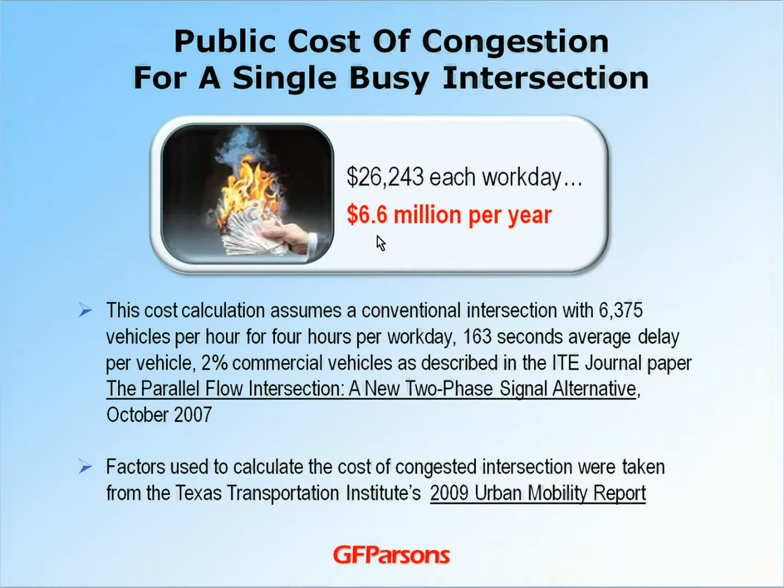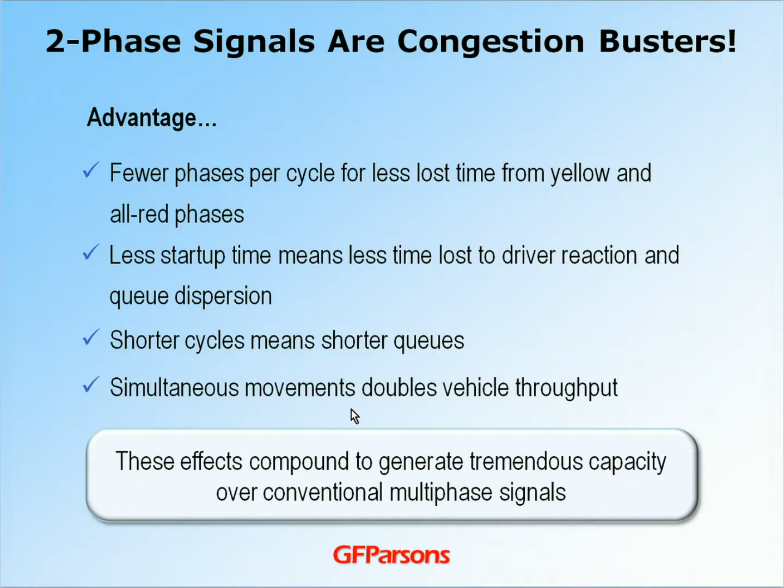But there is a solution: the two-phase signalized intersection. This is an at-grade intersection with no bridges or retaining walls. The two-phase intersection won't solve every congestion problem, but it should be given serious consideration as an alternative to interchange construction. A two-phase signal will have fewer phases per signal cycle than a traditional signal, less startup time, shorter cycle lengths, and simultaneous vehicle movements. So all these advantages compound during operation to make the intersection very efficient.

The two-phase intersection currently comes in 2 types, the PFI and the more commonly known CFI. There are several CFIs that have been built and are currently in operation. The main difference between them is the placement of the bypass roads, with the CFI putting them directly adjacent to the approach road and the PFI adjacent to the crossroad. So for more information on the CFI, I suggest the FHWA publication, Alternative Intersections, Interchanges, Informational Report.

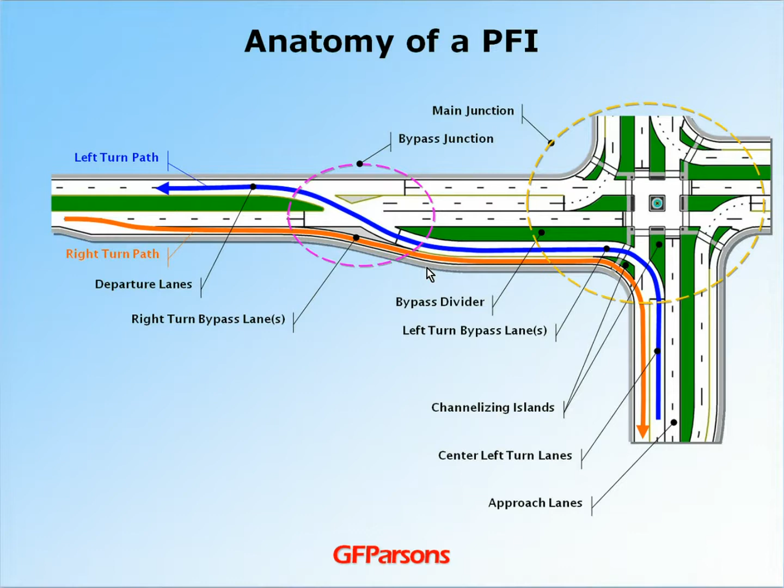At first glance, the PFI might look confusing, but a more careful look will reveal that it's basically a standard intersection, but with channelizing islands added to guide drivers and a bypass road to remove conflicting movements from the main intersection. How does the PFI work? It's pretty simple really. Drivers turn left onto a bypass frontage road just before the main intersection. This is different than the CFI, which requires drivers to turn onto a bypass ramp far in advance of the cross street.

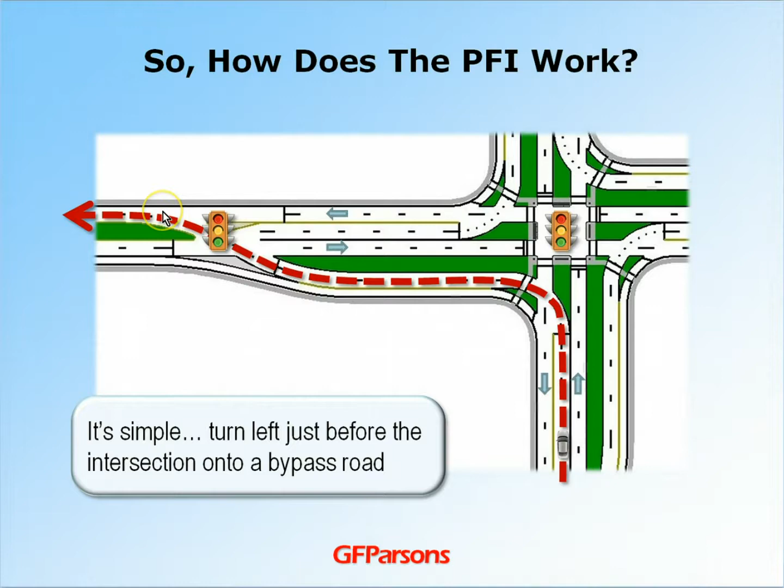Channelizing islands are added at the main intersection to guide drivers onto the bypass road, and a traffic divider to separate the bypass road from the cross-street traffic. The left-turning driver then turns onto the cross street at the bypass junction. By removing the left turn from the main intersection, otherwise conflicting vehicle movements can then be performed simultaneously. This is how phases are removed from the signal cycle.

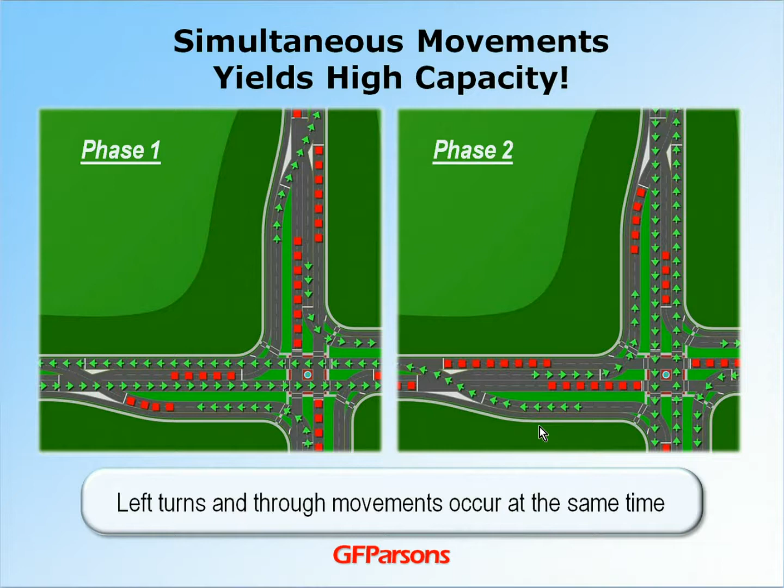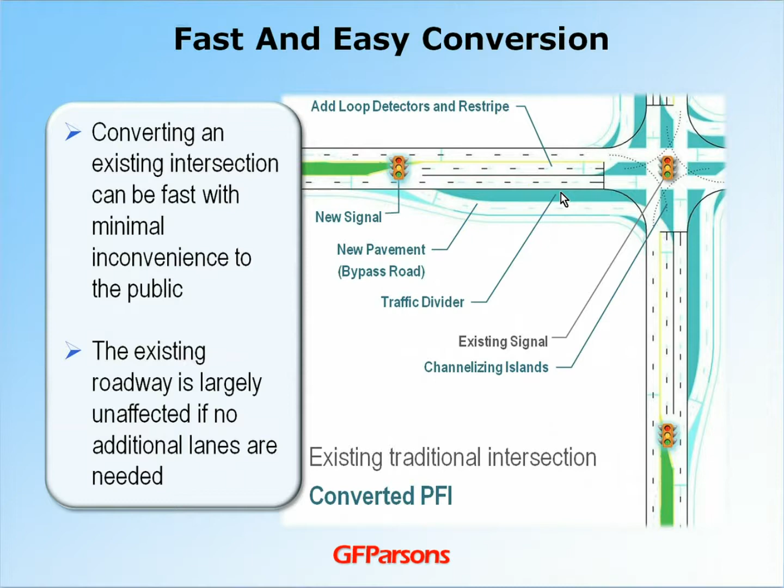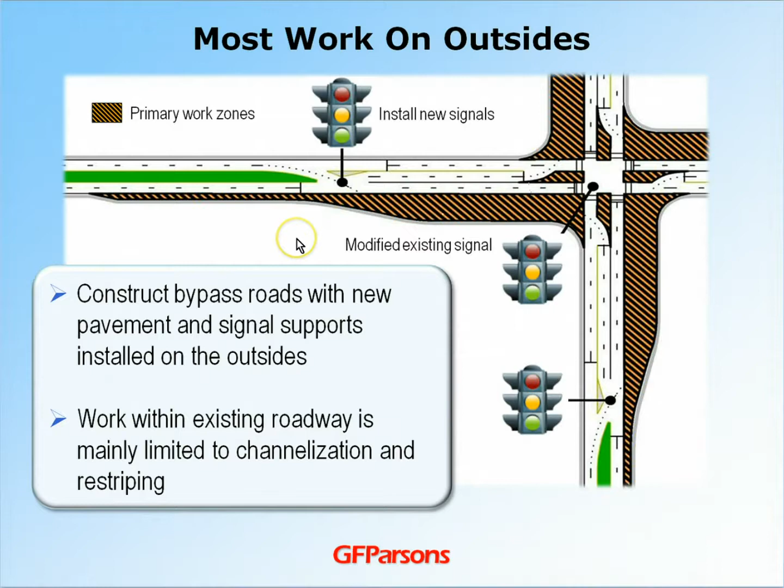Constructing the PFI at an existing intersection can be a relatively quick, simple, and safer operation. In many locations, the traveling public will experience little inconvenience, since most of the work is performed on the outside of the existing roadway. So we can see from this graphic that the work zones are largely on the outsides. This will be true if no additional lanes are added to the existing roadway. The PFI can be expected to improve safety over that of conventional intersections. There are fewer conflict points, no permitted left turn movements, and pedestrians have use of refuge islands.

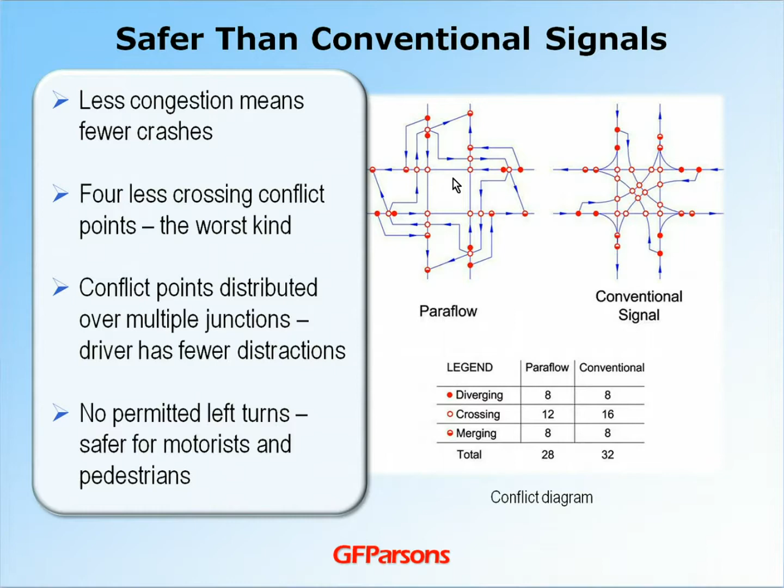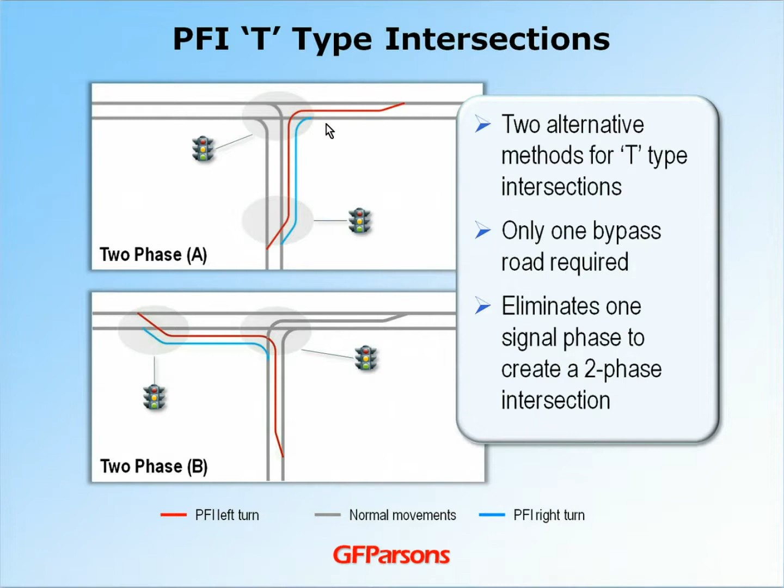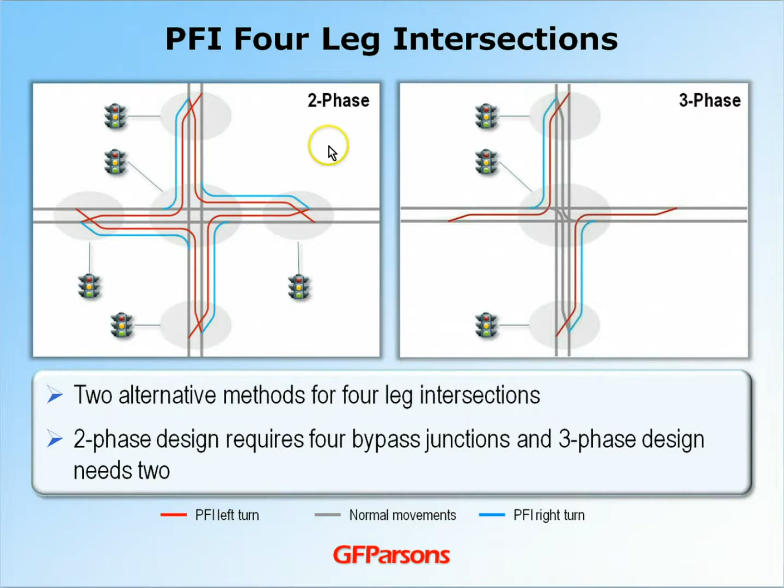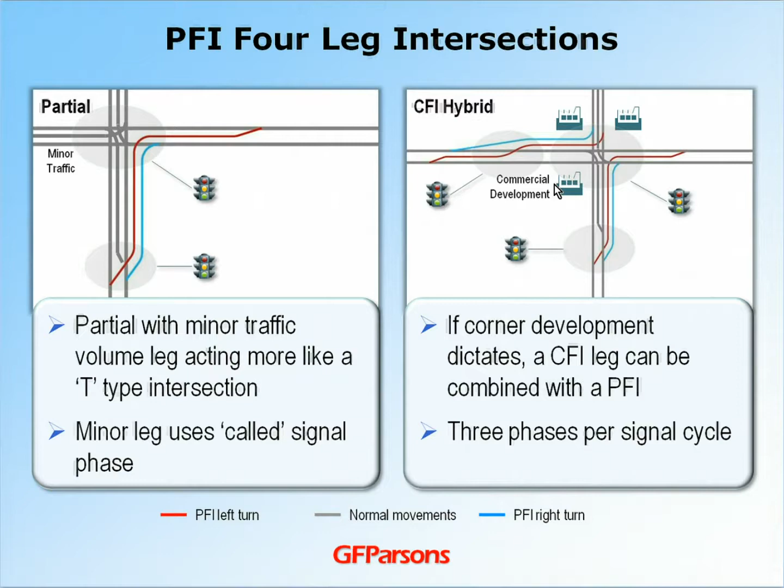The PFI can also be constructed in several interchange arrangements to create 2-phase operation on the arterial. The parallel flow interchange will have capacities exceeding the diverging diamond interchange, depending on the site. The physical site will determine which design is most economical. In this graphic, 2 variants of PFI diamond, or PFDI, are shown. For an interchange conversion, the spread variant under the freeway can be a very economical conversion, even much less expensive than the DDI, if there is space under the end spans of the bridges for the bypass lanes.

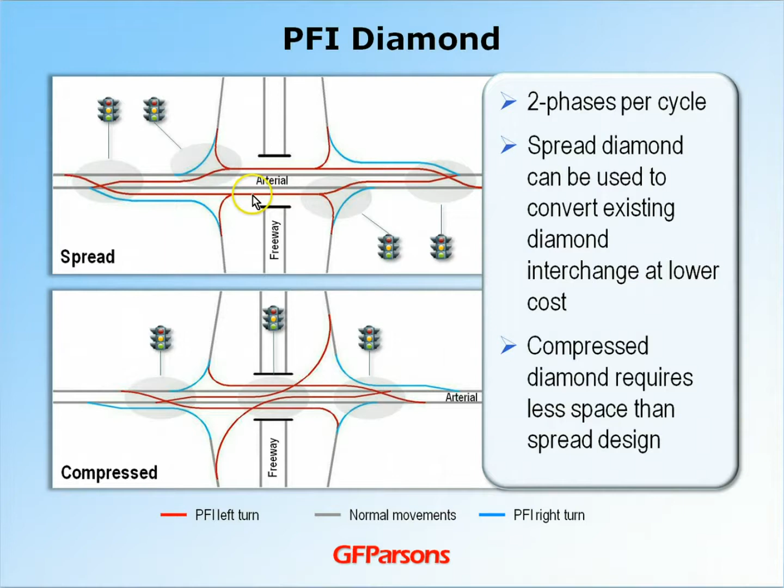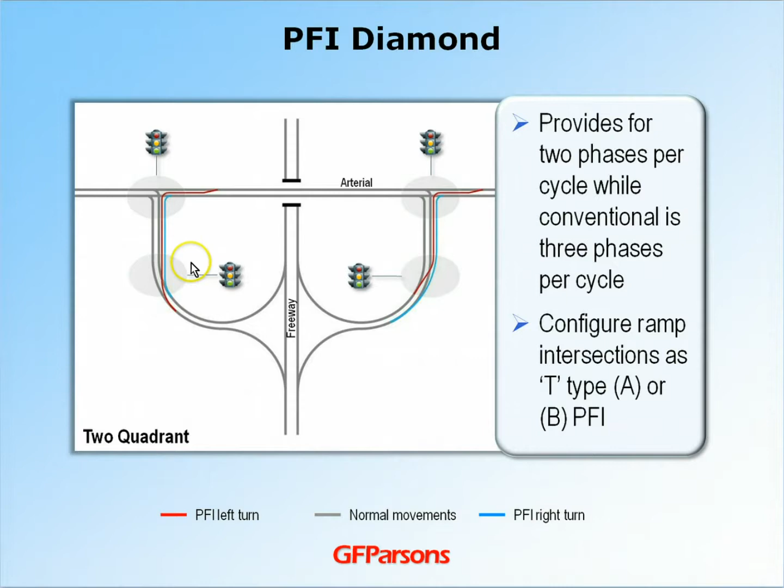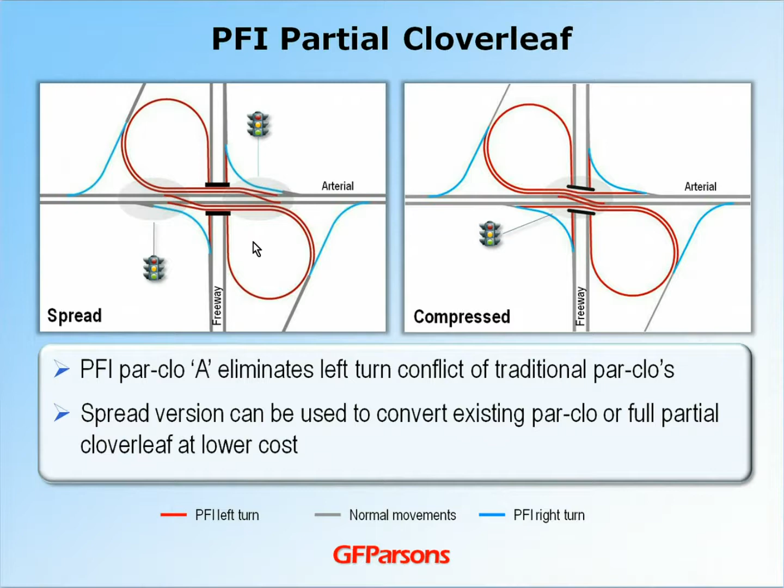A 2-quadrant diamond can also be converted to a PFDI. The ramp intersections can be arranged as PFI intersections to obtain 2-phase operation on the arterial. This is only going to be possible if the existing ramps will accommodate the bypass junctions. And finally, partial cloverleaf interchanges can be converted to a PFI parclo. Doing so will eliminate the ramp movement conflicts from the arterial. And like the PFDI, this conversion is very inexpensive, where the freeway goes over the arterial and there's enough space under the bridge end spans to fit the bypass lanes. The PFI can also be modified for different traffic and site conditions where necessary.